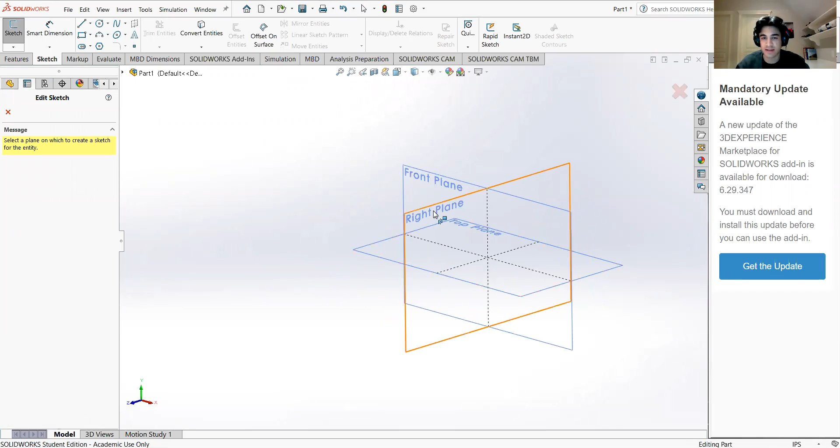So I'm going to create a new sketch and select the right plane. We took measurements from our previous workshops of our connecting rods, and we're going to make a crankshaft according to those dimensions.

Initially, I'm going to select a circle and give it a diameter. Using the Smart Dimension tool, give it a diameter of 4 inches. Then I go into features, extrude, and we're going to extrude that by 2 inches using the blind feature, meaning it'll go through anything as long as it's within that 2-inch depth.

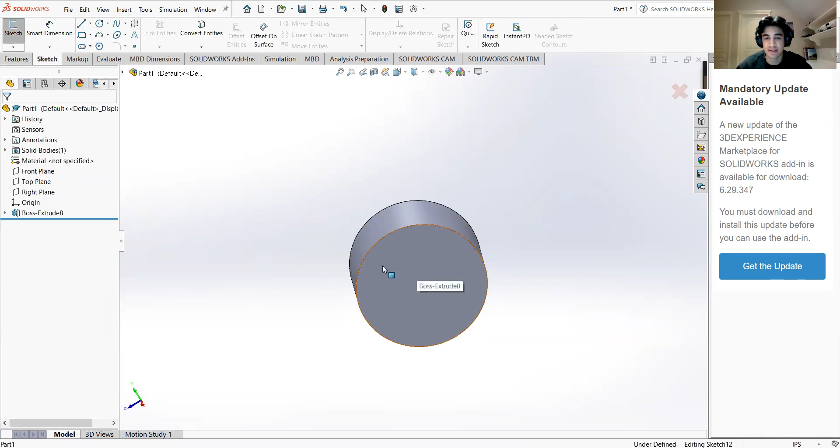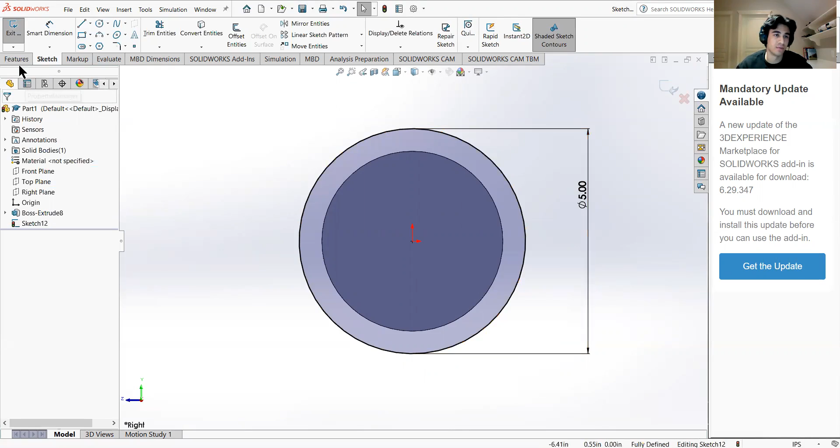We're also going to create a new sketch on the face of our cylinder, snap to the location, fit, and make this a circle with diameter 5. Now that all our lines are black, like the previous sketch, and fully defined, we're going to extrude this one as well, by 0.5 inches.

These first two parts were pretty easy, so I went through them quickly. But for this next sketch, there's a lot of detail we're actually replicating from our initial piston design, so you'll have to follow along closely for the dimensions to make sense in the context of the assembly.

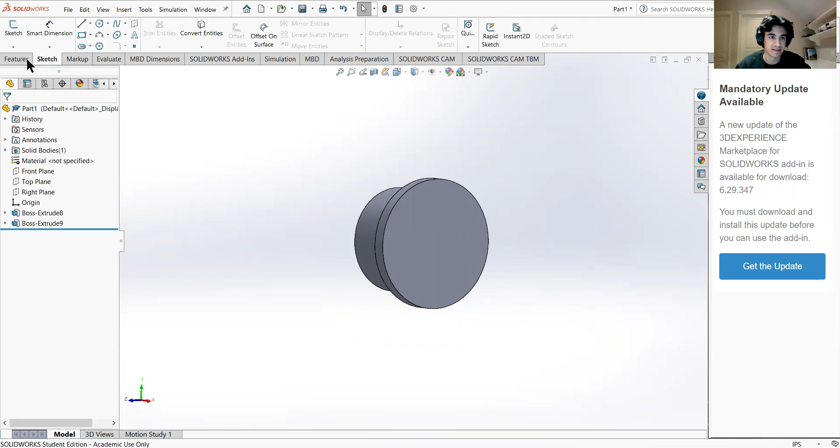I'm going to make a new sketch on the front face of our newest extrusion, snap fit that once more, and make an arbitrary 3-point arc that's horizontal, like so.

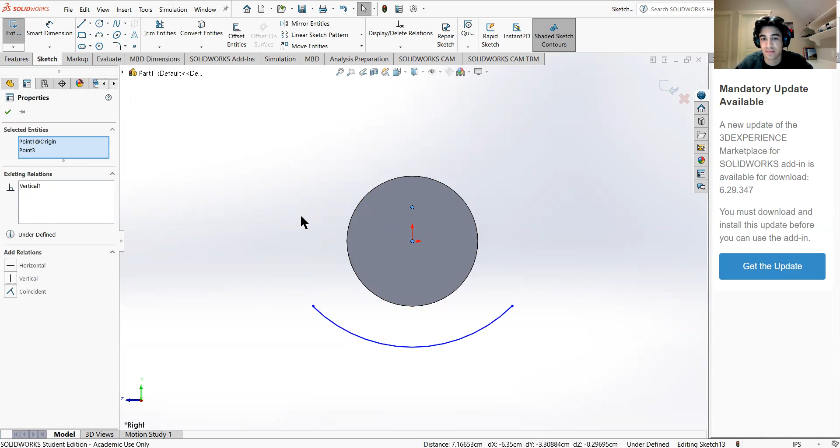I'm going to add some relations first. I click on either end, shift click on either end of this arc, and give it a horizontal relation. For this top vertex, where the radius of our arc is defined, the point at which we drop it down to create the radius, I'm going to make sure this is central to our sketch by clicking that point, shift clicking the origin, and giving it a vertical relation. As you can see, the arc is right in the center of our sketch.

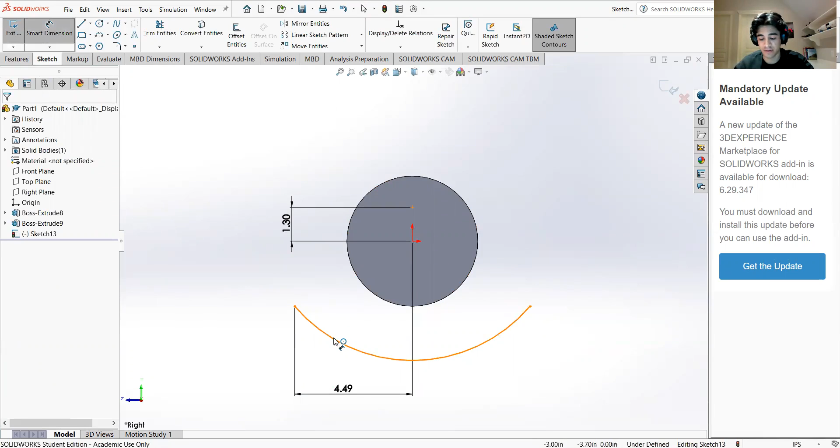We're going to give a dimension of 1.3 inches to the vertical height of these two points. Then for the horizontal length, the distance at which the furthest point of the arc reaches the origin, we're going to give that a distance of 4.49 inches. Finally, we're going to give ourselves a radius — if you click on the arc itself, it'll prompt you with a radius — and I'm going to give a radius of 7.3 inches. As you can see, everything is still fully defined, so that's perfect. We're going to move all the dimensions to this side just for clarity.

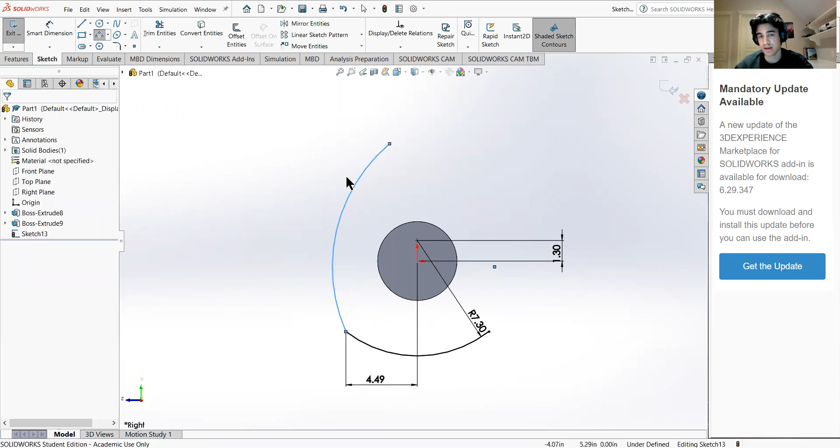Now the next step is to make another arbitrary 3-point arc. We're going to click somewhere here — it doesn't really matter. This whole sketch is creating the counterweight, or one of the counterweights, of our crankshaft: the big egg-shaped components that sway alongside the piston and keep it in place, clamping it on either end.

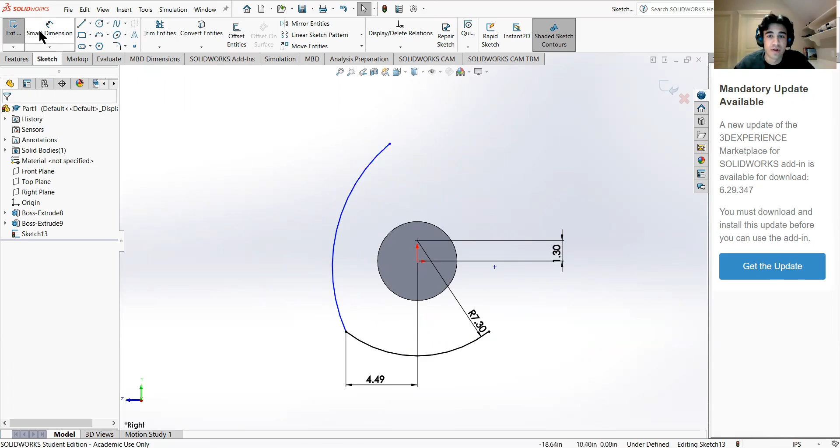So it'll provide a normal force in that regard. For this one, I'm going to select the top vertex of our arc and click the origin. I'm going to give it a horizontal distance of 3.18 inches. Again, these may seem arbitrary, but they're actually dimensions pulled from our initial assembly.

What I'm going to do is click on the arc itself and give it a dimension of 13.74 inches. So that should look like that.

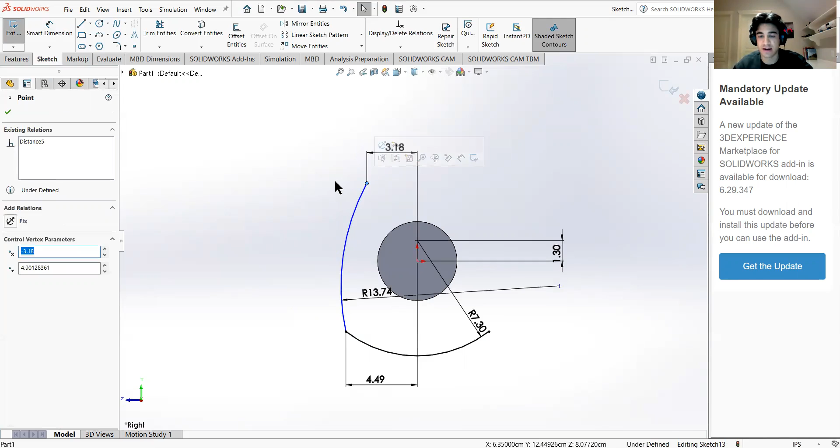We're going to move this down a little bit. It doesn't really matter how far you move it down, because the relations will sort the whole sketch out once we're done with the remnants of the sketch.

Finally, I'm going to click the Mirror Entities tool, and select this arc that we made. Essentially, I want to mirror it on the other side of our sketch without having to recreate the whole thing from scratch. So we're going to click Mirror About, and click on the Feature Manager Design Tree.

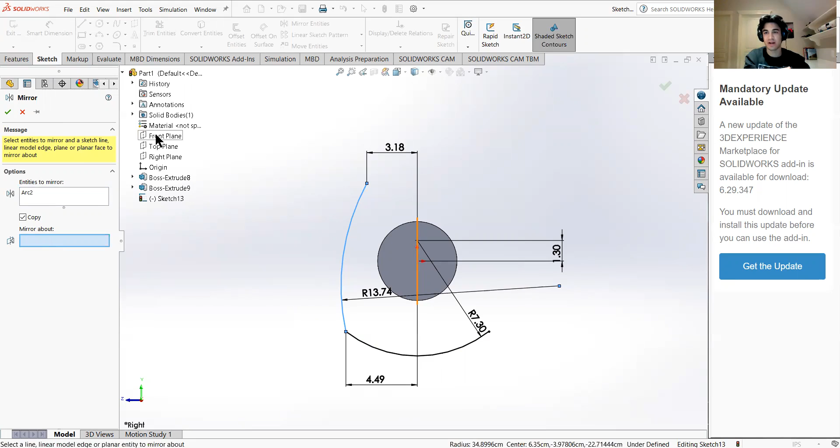What we can do is select the front plane. As you can see, it cuts right in the middle of our sketch and acts as an axis. So if you click that and press OK, you'll see that it mirrors perfectly.

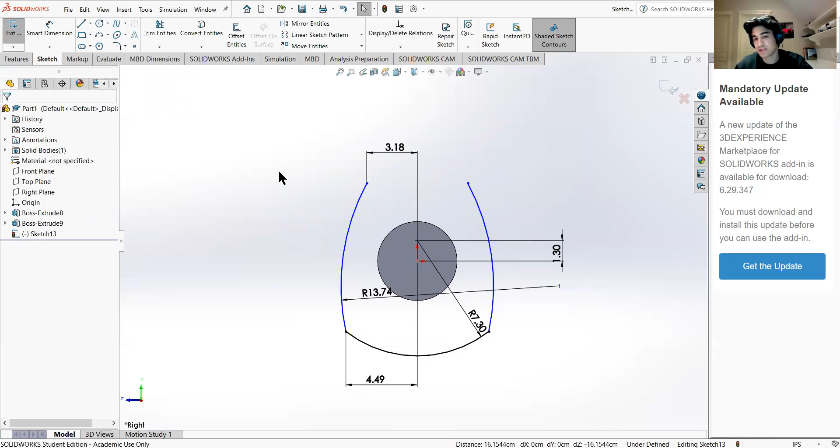We're going to apply another relation. Click on the outer edge of our arc here, shift click on this one, and we're going to say horizontal. That should help us out with the arc for now.

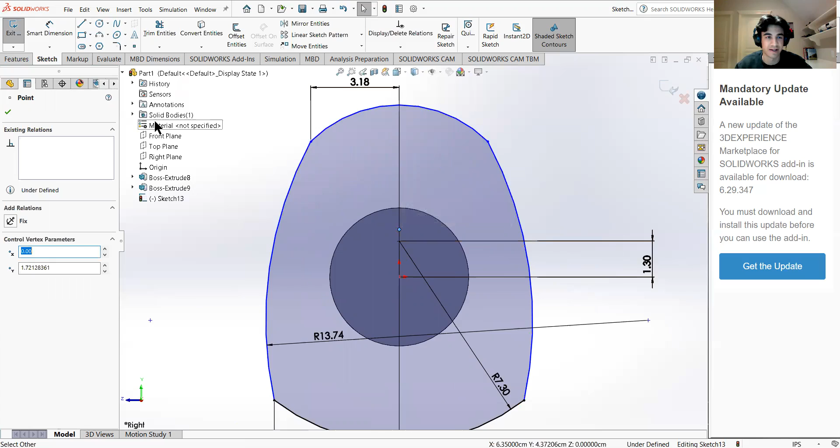I'm going to create a new 3-point arc connecting these two. Since these two are centered because they're symmetric, we can make a new arc on top like this without any concerns. You'll notice that the center line, or the axis of this arc, is directly above our origin. That shows that we've done everything perfectly up till now.

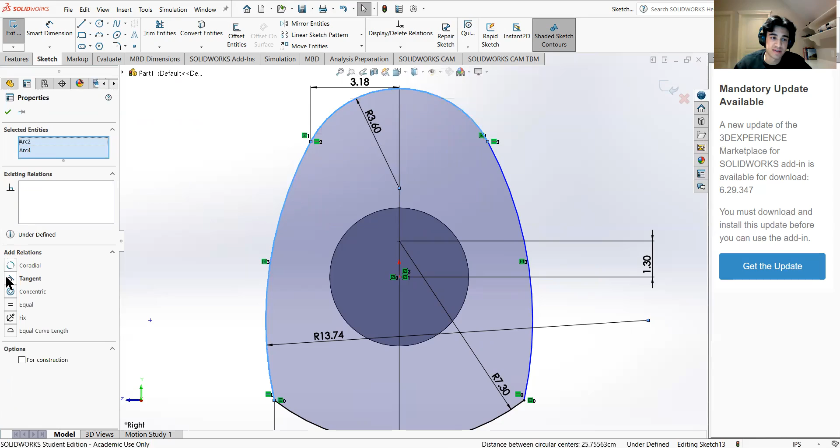We're going to give this a dimension of 3.6 inches for the radius. If we click on this arc, and shift click on our new arc, and press tangent, you'll notice that everything is fully constrained now.

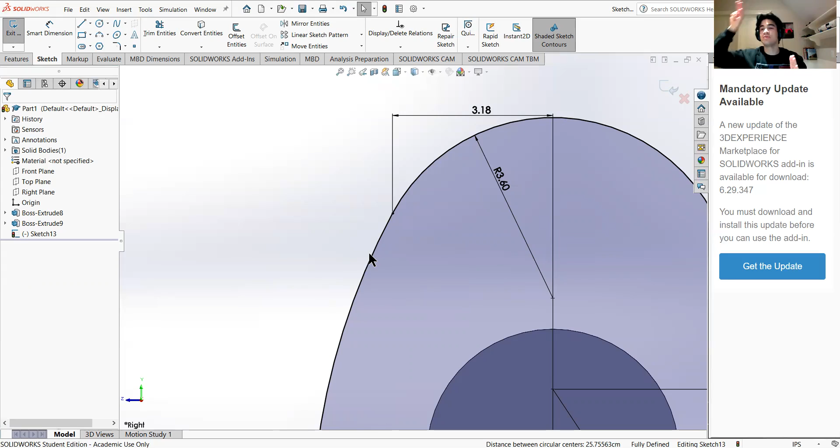Essentially what we did there with the tangent relation is we made sure that this is a rounded surface. If we were to keep the two arcs as they were, there's a chance there would have been a slight bump or roughness to our shape. So by selecting tangent, we ensure that it's one smooth line that curves all throughout. This is what we want.

Now that this is fully defined, we can extrude this. I'm going to extrude it by, let me see, my instructions tell me 1.75 inches. These instructions will also be posted on McGill Academy's website.

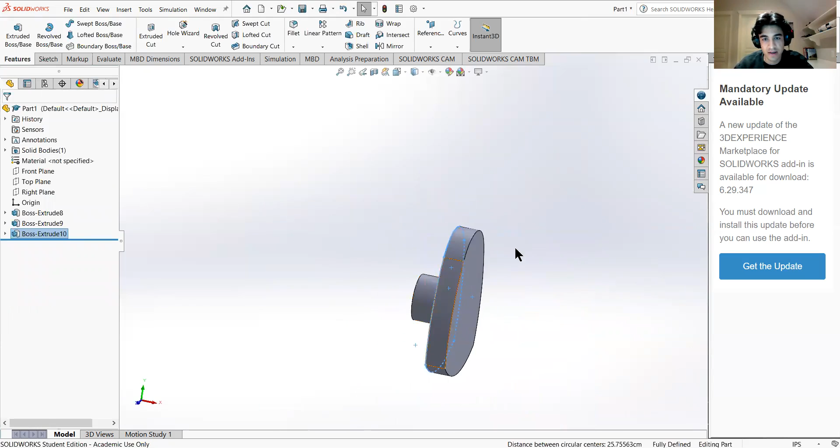So this is what we should have so far. It's starting to come together.

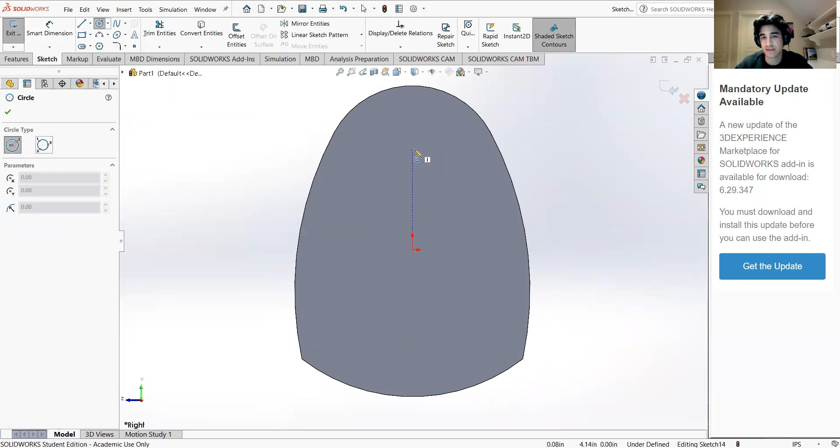Now we're going to make a new sketch on the surface of our object here. So I'm going to make a new circle, just an arbitrary circle, and give it a dimension of 3.8 inches for the diameter.

What we can do is give it a vertical relation such that it doesn't move relative to our origin horizontally by that metric.

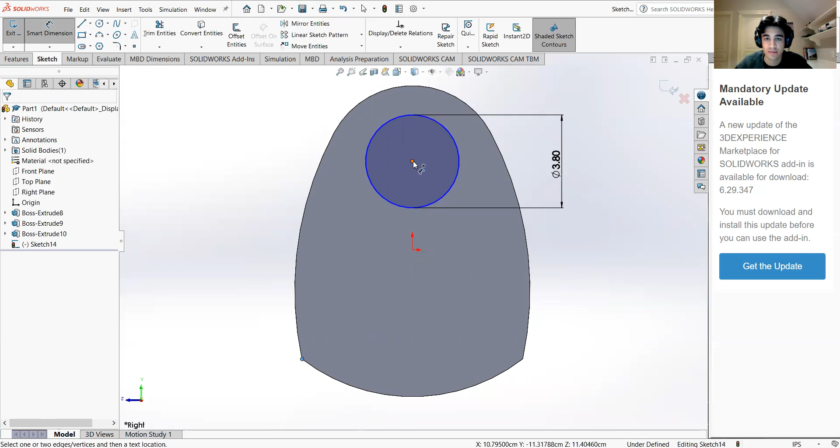I'm going to click the bottom vertex of our previous extrusion, and select the midpoint, or the center of our new circle, and give it a dimension of 7.96 inches.

Perfect. This is sort of where you want the circle to be vaguely positioned. So it's fully defined now. We can sketch this, extrude this.

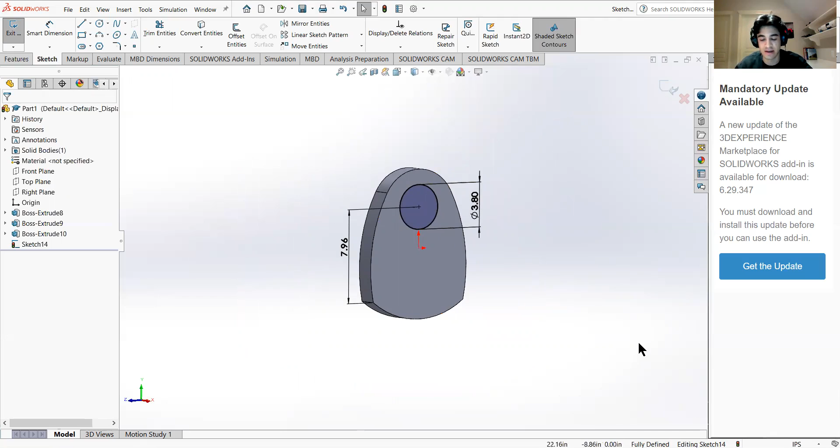What we're going to do is extrude it by half of the length that we actually want for this part, and you'll see why. So 1.1 inches is how much I'm going to extrude this by. Essentially, this will allow us to mirror everything very easily.

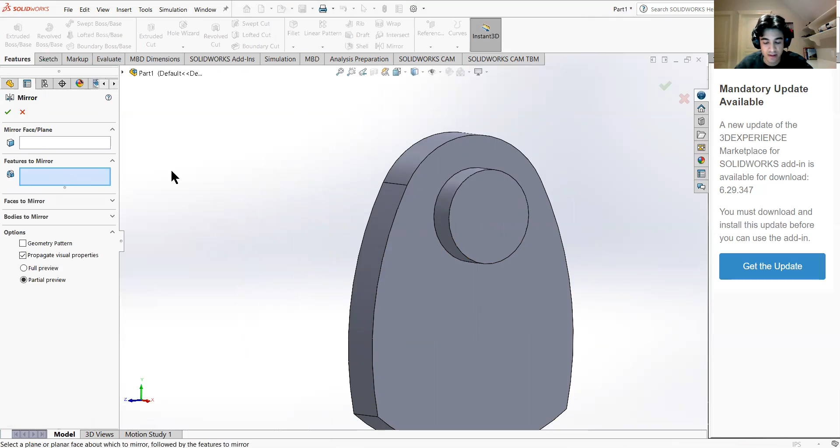So what we can do is click mirror here. Essentially what we want to do is click features to mirror. We'll click this extrusion, as well as the actual part that we just extruded.

For the mirror face slash plane, we're going to click on the front face of this new extrusion. As you can see, we're completing our assembly very easily like this without having to do everything from scratch. So if we press OK...

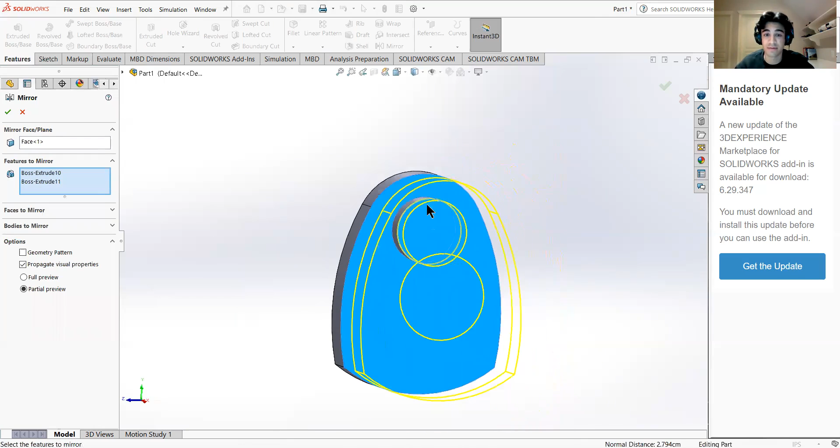Oh, that didn't show up for some reason. My apologies. Let me see. Huh, that's peculiar. Okay, let's try this again.

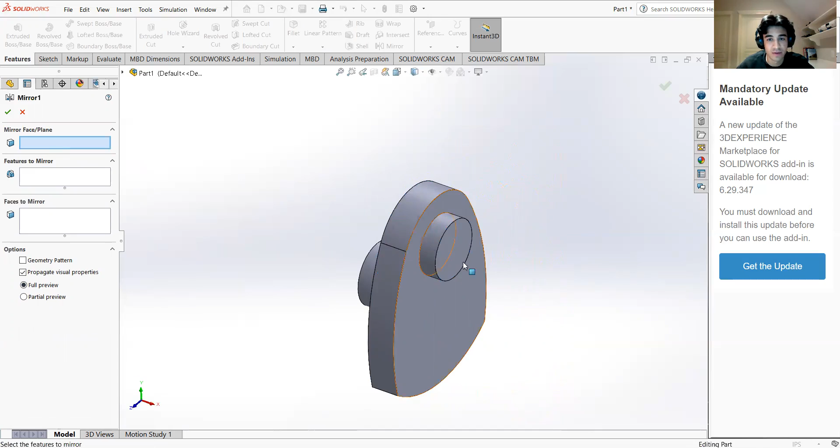So if I click on this front face here, and for features to mirror, I'm going to click this guy and this guy.

Okay, that's peculiar. No worries at all, we can actually do it from scratch if we need to. So let's do that.

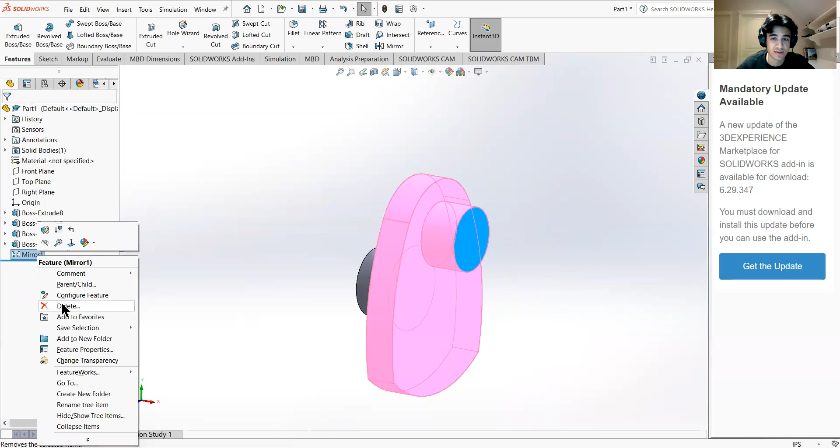What I'm going to do is extend this extrusion. For some reason my mirror tool isn't working right now, but we'll skip ahead. I'm going to extrude it the full 2.2 inches. We did halfway, 1.1, now we're going to extrude by 2.2.

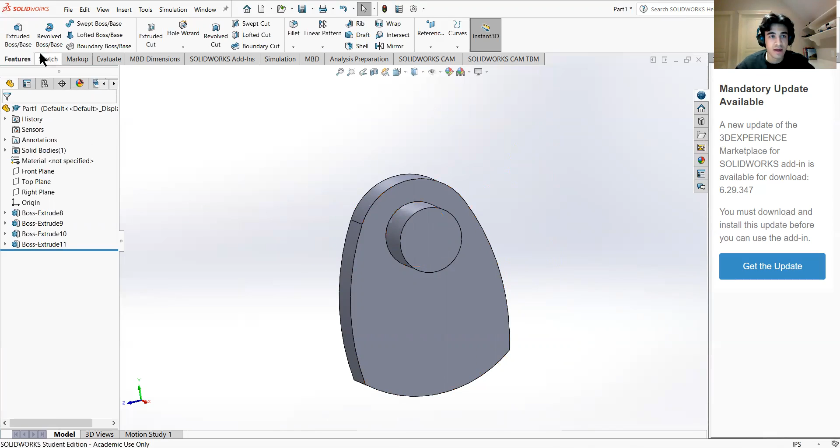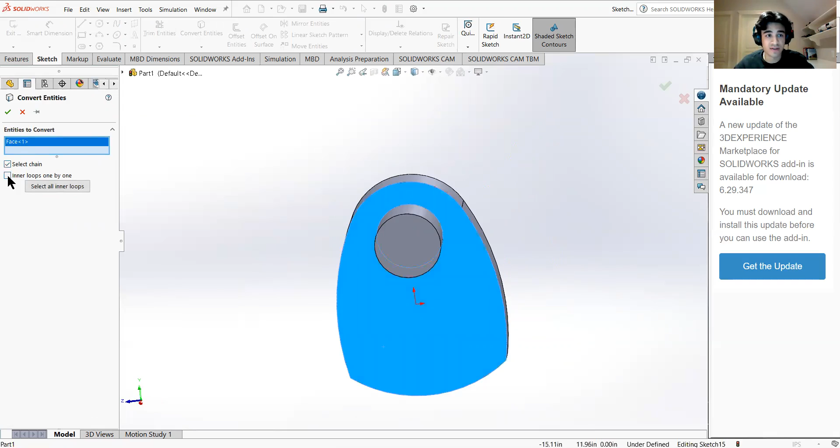For the sake of this tutorial, I'm going to use the Convert Entities tool for the next portion. I created a new sketch on this new front surface that we created, and I'm going to click Convert Entities. Essentially what Convert Entities does is it takes the face that we select, which was this previous face that we sketched up before, and projects it onto our new sketch. Think of it almost like a copying tool, but if you've done linear algebra, it's a projection.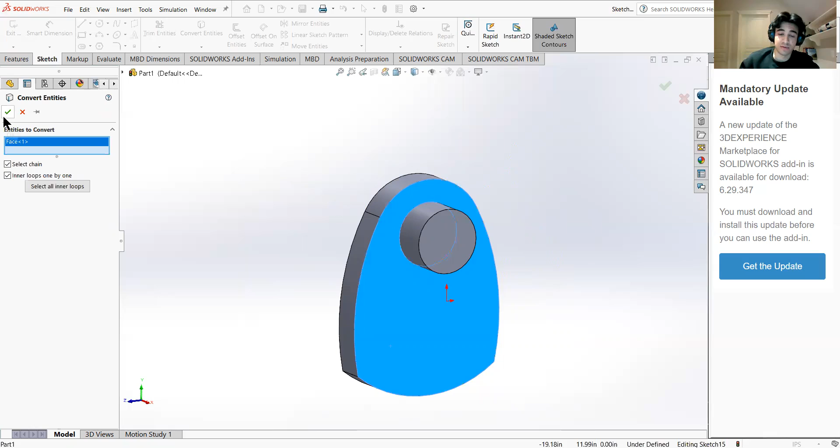So say if it was off by an angle, it would only get maybe half of that if it's at a 45-degree angle. If we press OK by selecting that face, you'll notice we've actually copied our sketch from before without having to re-sketch everything. So it's a very convenient tool.

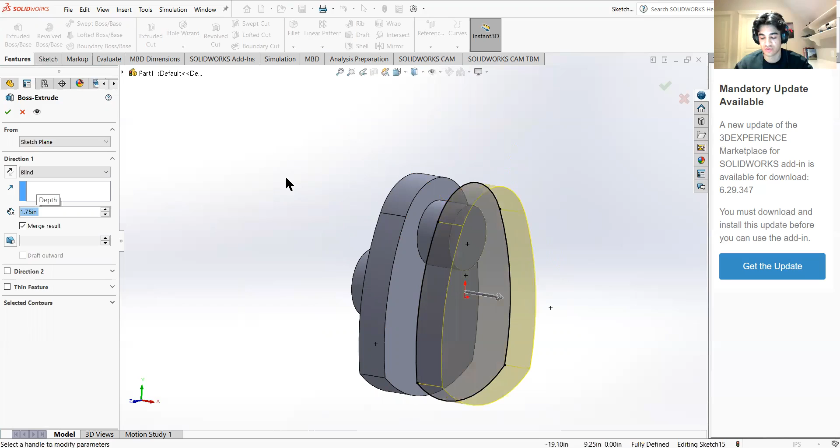I'm going to extrude it by the same amount that we extruded this first sketch that we made. This one was done with a 1.75 inch extrusion. So if we press OK, there we go. Now we have our new counterweight. So we're starting to come along a little bit here.

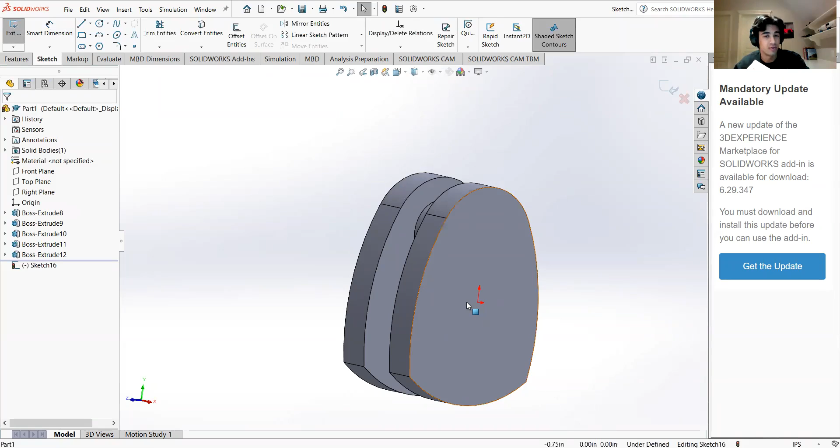So if I go back and sketch once more, I'm going to sketch on the front face of our new extrusion. What I'm going to do is convert this first face that we made, essentially extending the chain, and I'm going to extrude this by 6 inches.

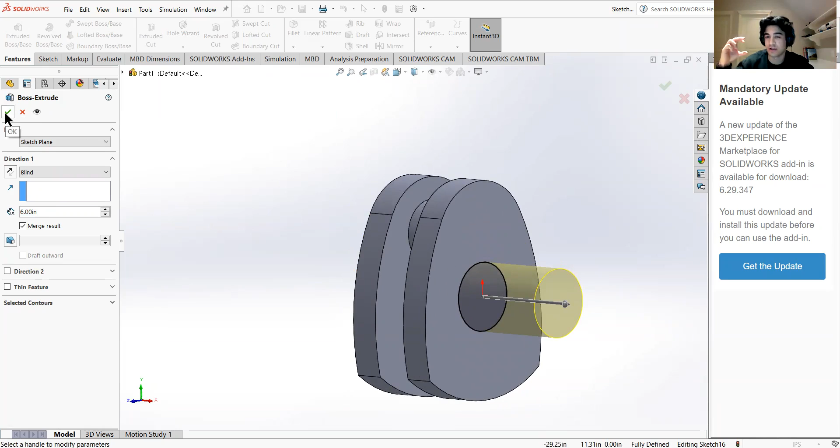So it should look something like this, and you should have a diameter of 4 inches for this shaft. Okay, all right, so let's see what else can we do here. So for this next step, this one's actually pretty creative and I do like it quite a bit.

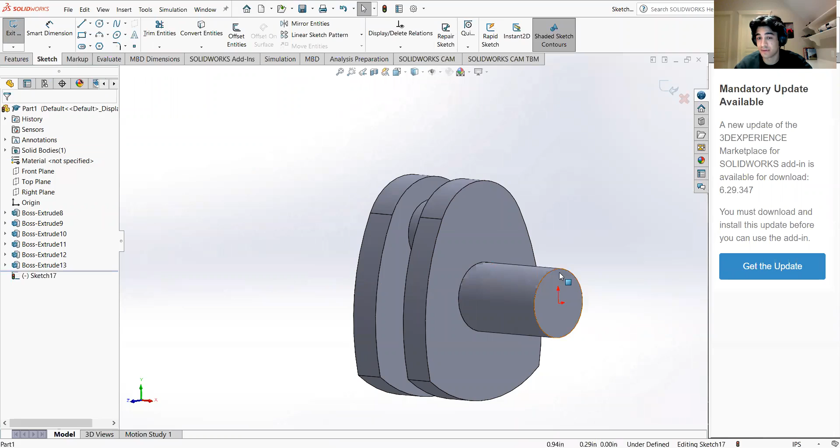Essentially what we're going to do is make a new sketch on the front face of this new extrusion, and once again we're going to use the Convert Entities tool. Now you may be thinking, why are you converting the same face again? Doesn't this counterweight need to be upside down if you're familiar with a crankshaft design? And you're actually right there.

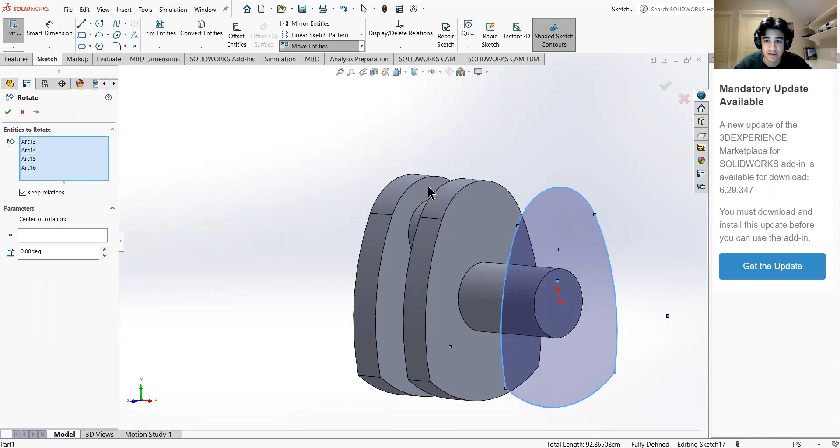So what we're going to do is click on, within the sketch portion, under this little arrow within Move Entities, we have a Rotate Entities option. We can click this entire arc, this entire piece of rotation, and we want to rotate it about the center of rotation, which is going to be this point here, the point that our whole design was made about. We're going to rotate it by 180 degrees.

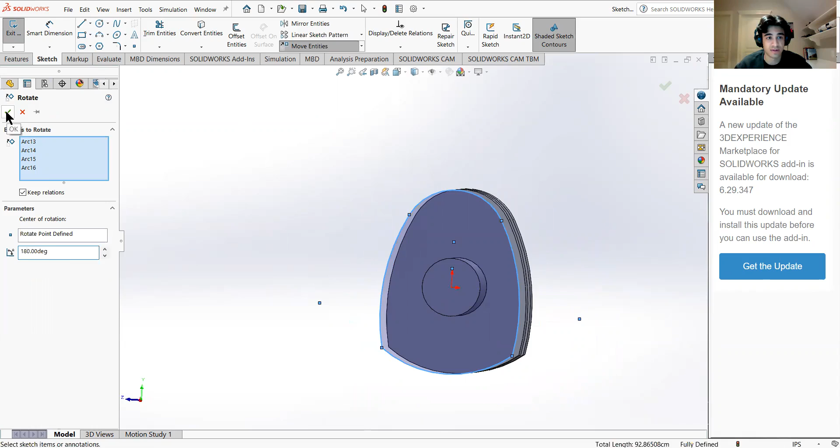So if we rotate that, oh sorry, it didn't work. My apologies, let's try that again. So we're going to click each of these entities to rotate, and for the center of rotation we're going to click our point here, and rotate by 180 degrees.

So essentially when we do that... peculiar, here, sorry, let me work this out. I'm going to check my instructions once more. For some reason this isn't... I figured it out, yep, we forgot to...

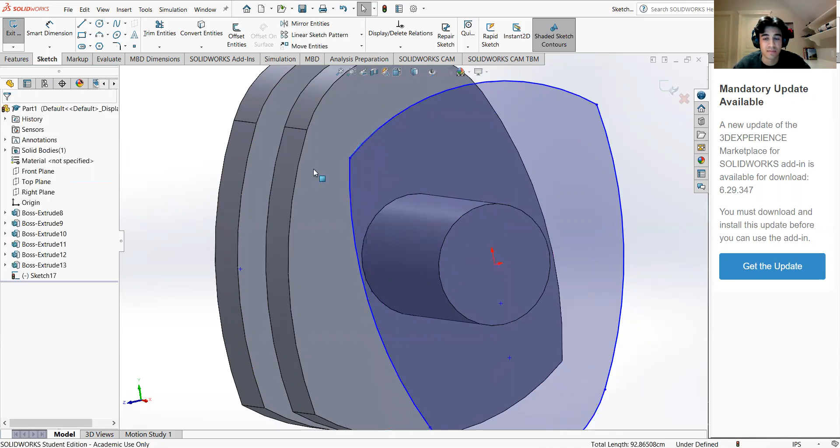Sorry about that. So if we click our center of rotation and rotate it, essentially what we want to do is uncheck the Keep Relations box. So as you can see, this is actually not defined, so we'll need to define it once more, which is perfectly fine. We'll just create a quick definition of everything, and everything's in place. So we don't need to worry about the accuracy of our actual definitions here.

So if we press OK there, and if we give this one another radius, this guy should have a horizontal relation here.

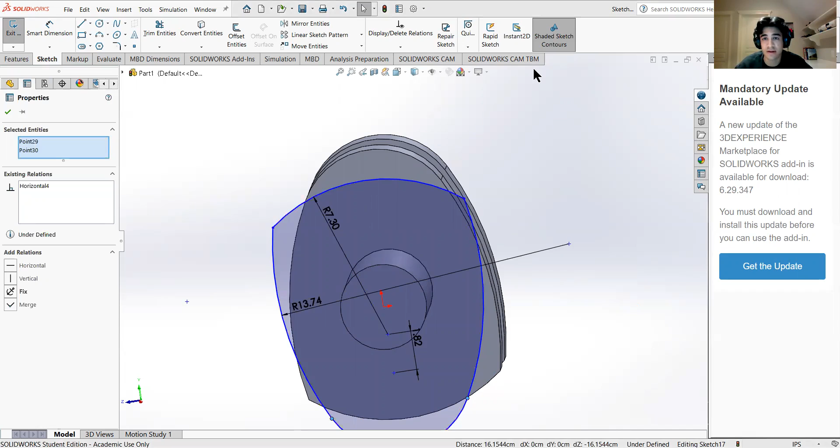And I think, sorry, one second, I think there may be a new participant joining. No, we're good, okay, perfect.

Let's see, we have this relation here.

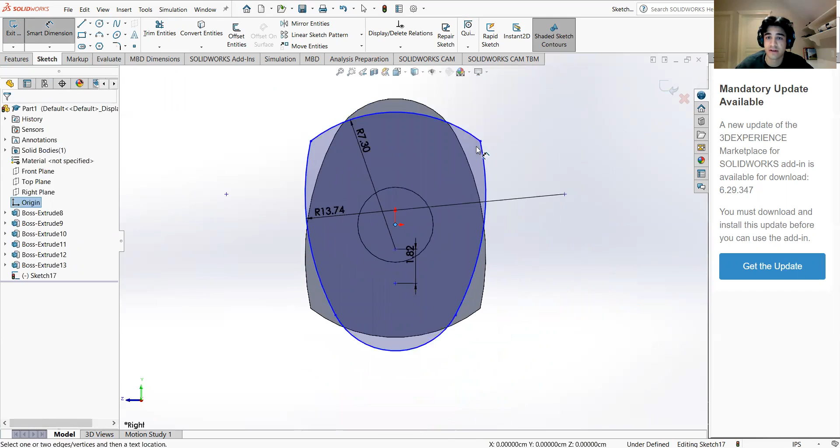The relations may seem a little bit tedious, and dimensioning may be annoying, but it's very necessary within your sketches, because if you change a certain feature within your object, you could risk losing your dimensions if you change something drastically. So you want to make sure everything's constrained to some particular reference.

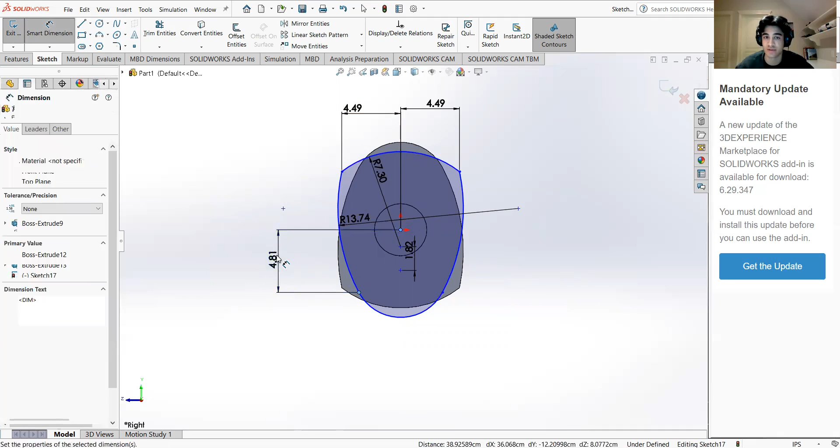Usually what you want is some sort of baseline reference. So let's add another relationship here. Okay, these guys should be tangent, as well as these guys. Let's see, are we missing any relations? We seem to be missing a decent amount here. Perfect, now everything's fully defined, and you can disregard all of these dimensions.

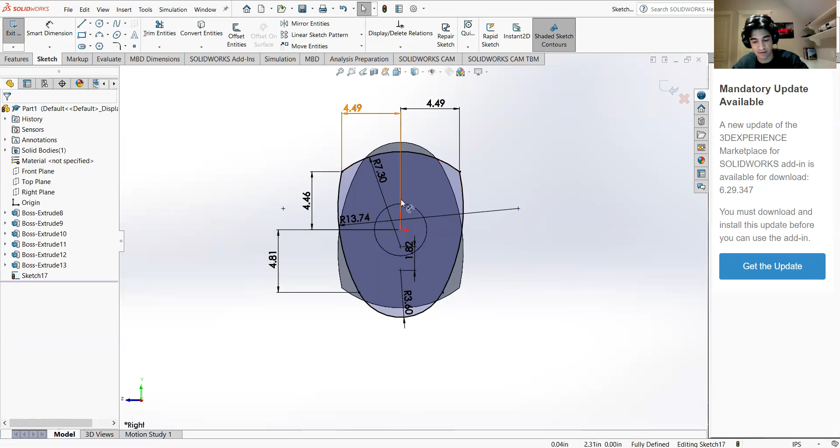So what we can do is extrude this by 1.75 inches and obtain a similar result to what we had before.

Okay, and we can do the same thing with the circle, or the cylinder that we made before. So what I'm going to do is sketch on this front face, and use the convert entities tool once more. Oh whoops, I accidentally selected a face that is perpendicular to the sketch plane.

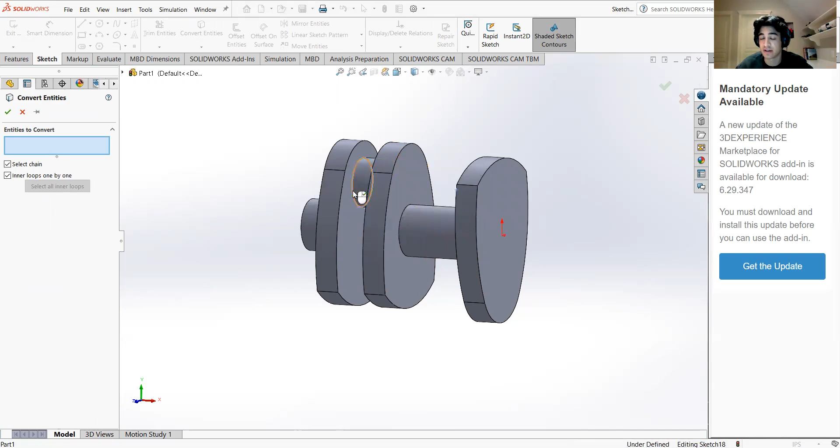What you need to do is actually click on this face, which is either parallel or oblique to the sketch plane. So we have this particular circle here, but what we're going to do is rotate this.

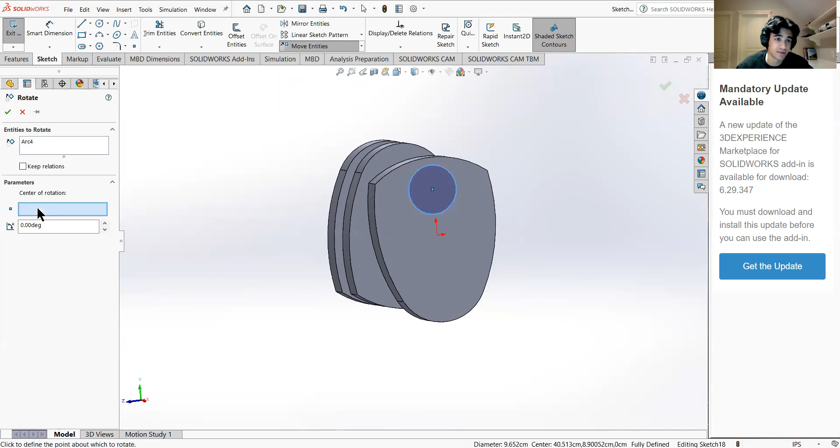Using the same tool we just used before, we're going to click on this as our entity to rotate. Our center of rotation is going to be this little point here, and we're going to rotate it by 180 degrees. If we do that, it'll get rid of our dimensions once more.

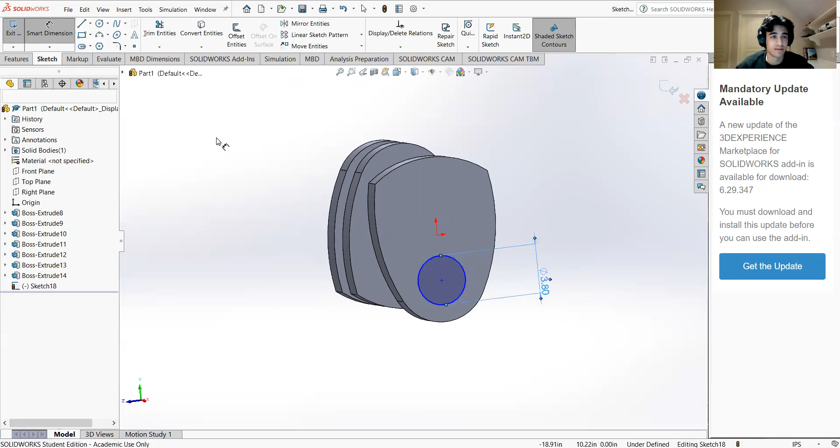Essentially what we want to do is give this a dimension of 3.8 inches, since that was our previous diameter. And if we snap fit, we want this to be 3.5 inches away, which is approximately what we had before.

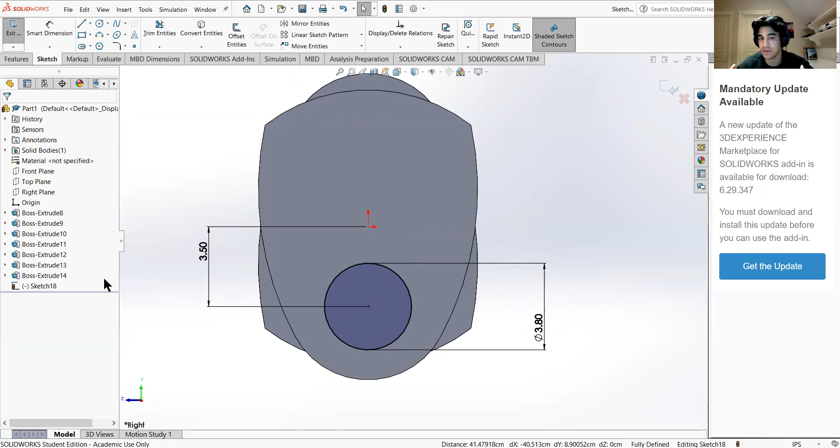And we want to apply a vertical relation to these two so that they don't move relative to each other. And if we extrude this once more, we want to extrude it by the same amount that we did before.

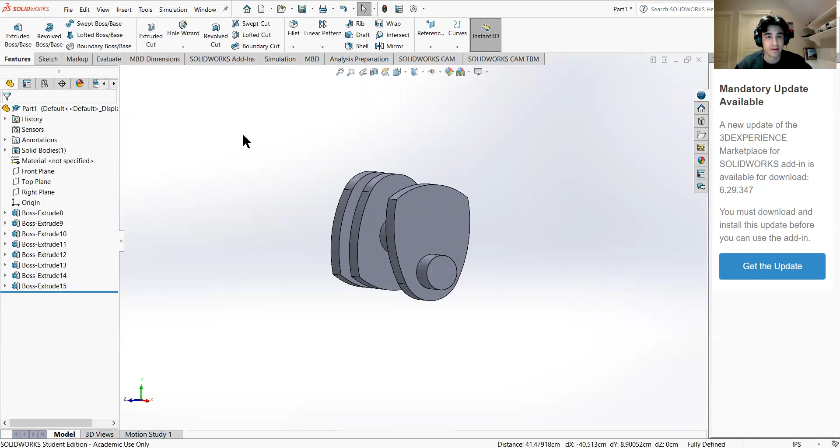Let's see, this one was 2.2 inches, if I remember correctly from before. And essentially what we can do is use the same technique that we used to copy this extrusion here.

So with a new sketch on this face, I'm going to press convert entities once more on this particular face. And then that's fully defined, so we can extrude it by 1.75 inches. Sorry about that.

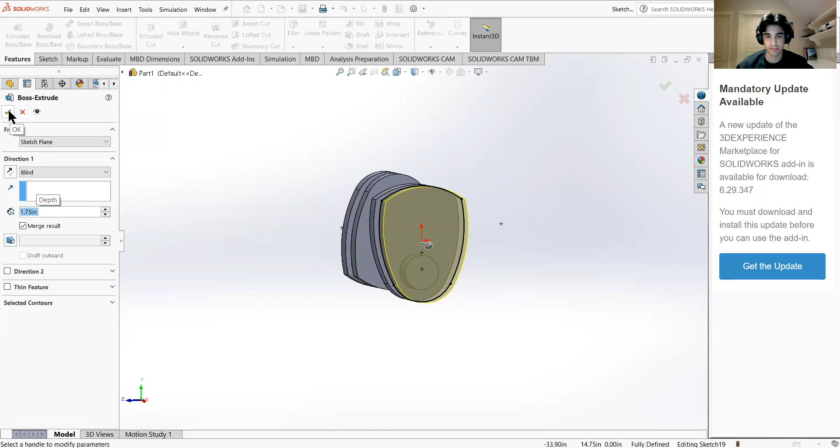Nice, as you can see it's starting to come along decently well. So that's perfect. Let's see, what else can we do?

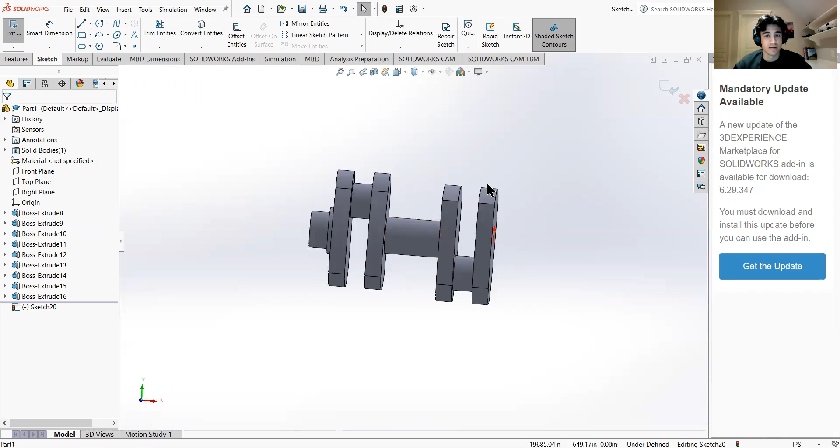We're going to make a new sketch on the front face, and extend this axle sort of connection that we had before. So what we're going to do is convert entities once more. This gives us a circle of diameter 4 at the same location that we had before.

But what we're going to do is extrude this by 3 inches, not by 4. And the reason is because we actually want to mirror the entire body.

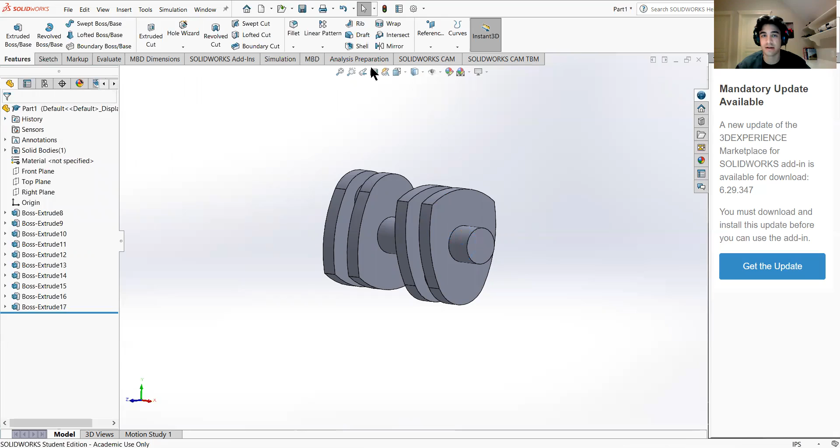So what I'm going to do is press mirror. For the mirror face/plane, I'm going to click this front face. And for the features to mirror, I'm going to select everything before it.

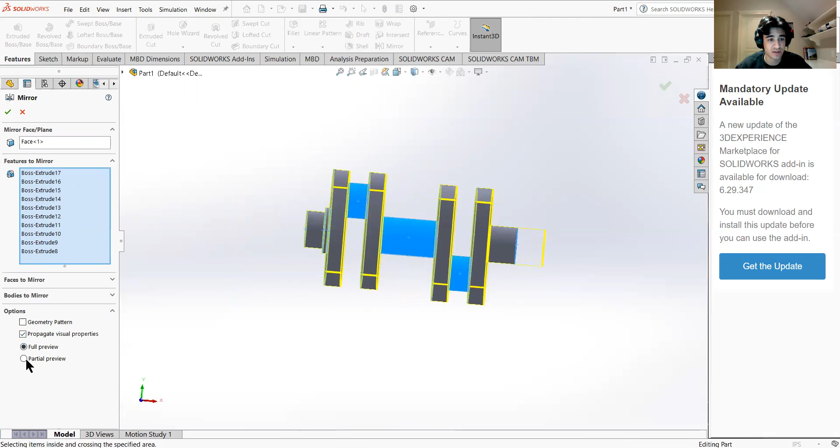And if we press OK, this should actually give us a partial preview. It did not do that properly. My apologies, let me retry that.

So if we mirror and click for our bodies to mirror, so it's a full solid body, we'll click that. There you go, we have our entire design right there.

And essentially what we can do is add some details to the ends of our shaft here. So what I'm going to do is sketch a new circle identical to the main bearing journal and extrude it by another 4 inches. Okay, so if we can do that.

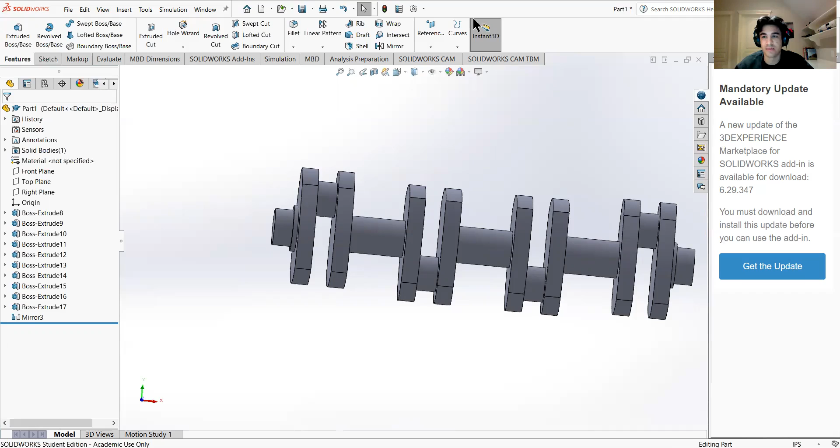Okay, so for the next portion, what we need to do is take our new end that we have here. So this is the mirrored portion. And what I'm going to do is create a new sketch, and click on this front face here.

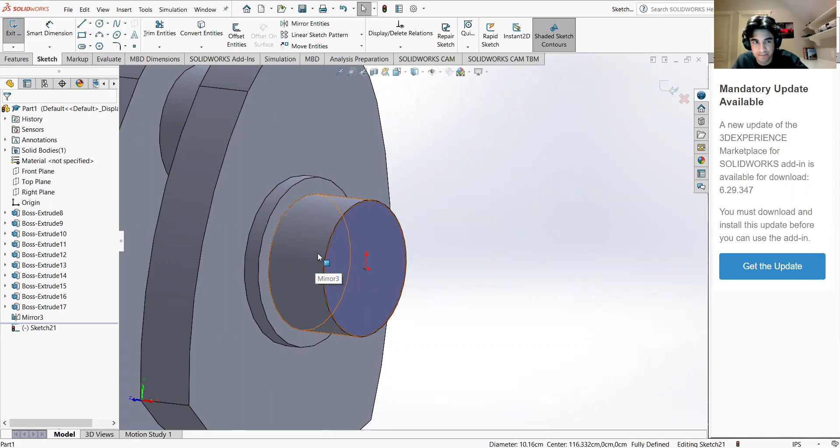And I'm going to convert the entity of this front face. So essentially I'm projecting this diameter 4 cylinder onto the end. And what I'm going to do is create a part that accommodates for the belt. So we're going to take this new circle and extrude it by 4 inches.

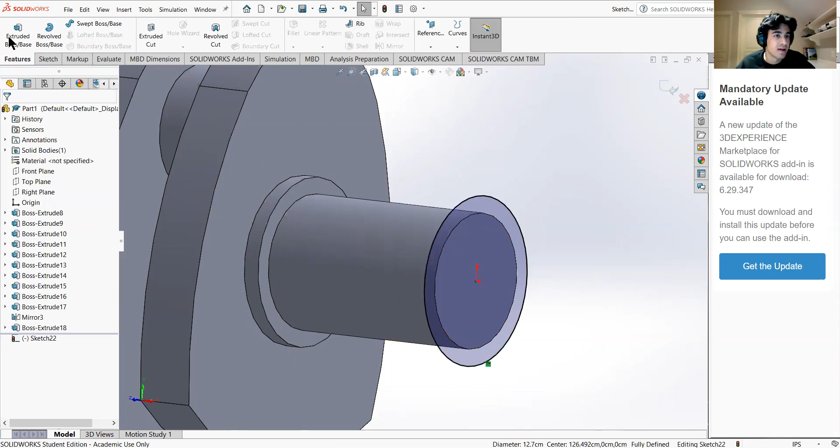That's perfect, then it merges. Now we're going to create a new sketch on top of that. I'm going to create a new circle, but this one, using the Convert Entities tool, will accommodate that larger circle we had before, that larger cylinder. So this is a diameter of 5 for this second circle. We're going to extrude this out by 2 inches according to what we've written, so 2 inches should be adequate.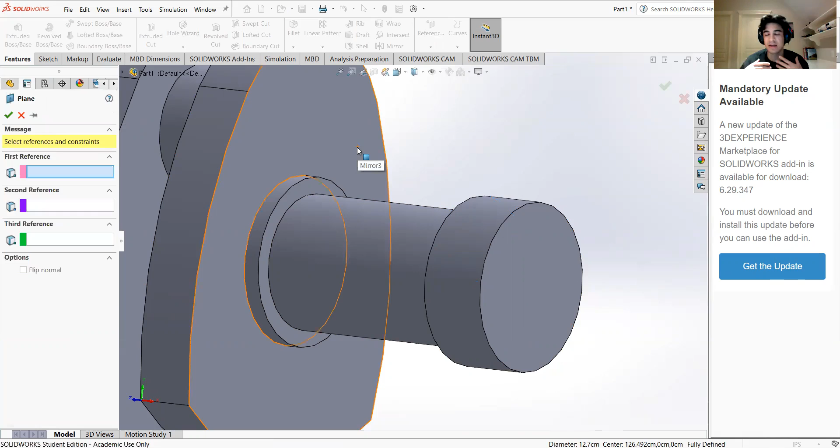Now we want to make use of our sweep cut tool. I'm going to create a new plane, which will mark the halfway point for our sweep cut. You'll see in the context of our sketch how useful this plane will be. I'll click this top half as our first reference, and the bottom edge as our second reference. As you can see, it automatically creates a plane in the middle of both of these. That's a very useful trick.

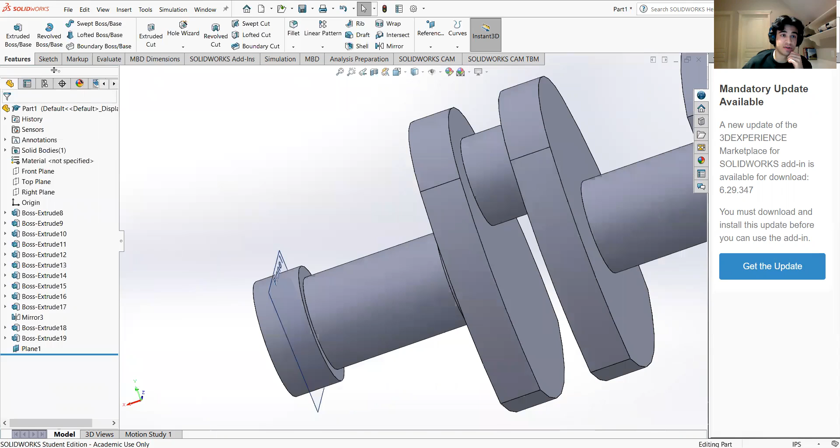I'm going to create a new sketch, but first let's go into our feature tree to decide what it should be on. The front plane seems to be the best option because it cuts right in the middle of our plane - it's perpendicular, but we'll still have a nice region for our sketch. So I'll click on the front plane here, and with it selected, I'm going to snap our view to our part.

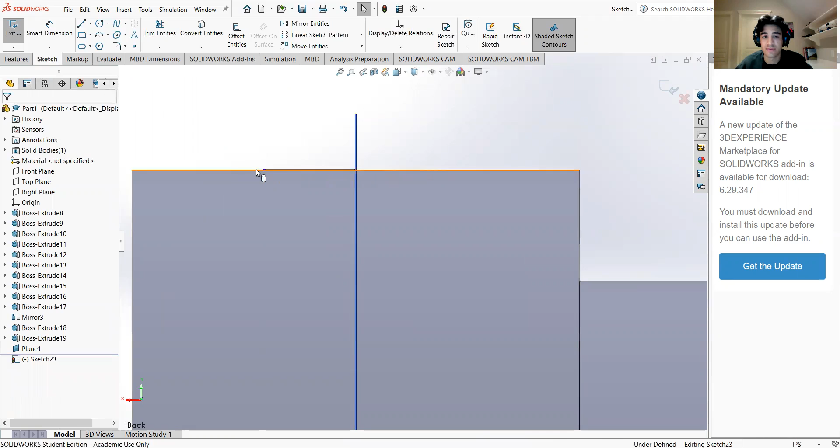I'm going to make the following feature: a line from the top edge of this cylinder to our plane, which will be 0.5 inches apart from the outer edge of our cylinder.

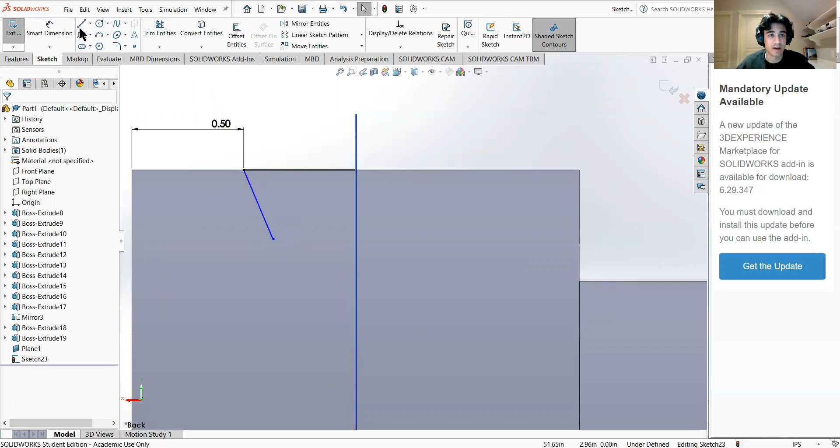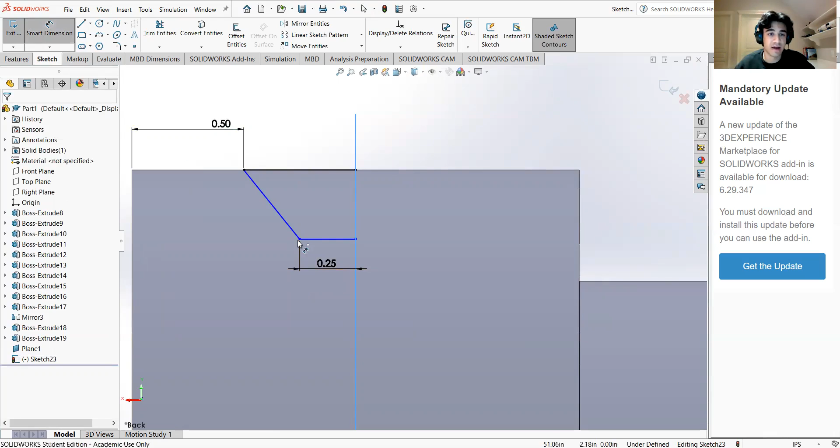Then we're going to make a diagonal cut in - doesn't need to be perfect. And we're going to have another point connect to the actual plane. This point here should be 0.25 inches apart. Altogether, the actual depth of this cut should be 0.5 inches.

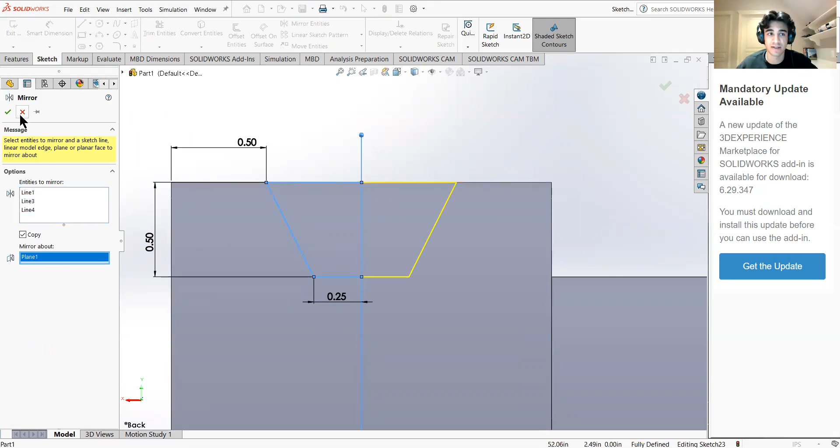As you can see, this is fully defined. What I'm going to do is mirror this about our axis. I'll click these 3 lines we made, and mirror it about the plane we just made. As you can see, we have this perfect groove that we're going to cut into our cylinder.

We can apply the sweep cut feature or the revolved cut feature - both work. For the revolved cut feature, essentially what you'd need to do is create an axis of rotation, but for this, we don't have to do that.

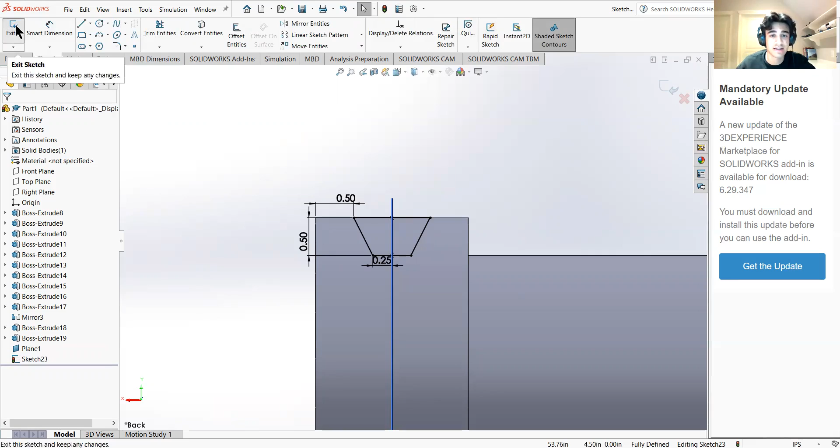So let's do that. If I exit our sketch and click on swept cut, having our profile selected, for the guide curve we can follow the path that we made. It's going to be on a sketch profile... okay, I don't believe we actually made the path for it.

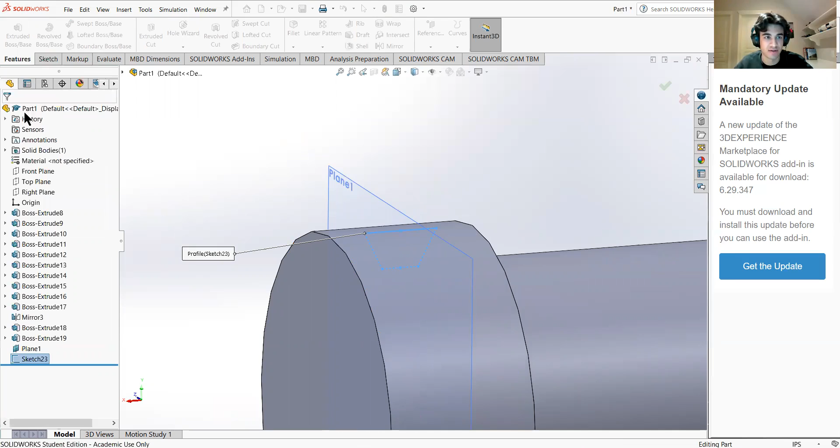So what I'm going to do is make a new axis, and we'll use the revolved cut instead. Let's get rid of this, click on that cylinder, and there you go - we have a new axis, and we can make a revolved cut, clicking this sketch that we just made.

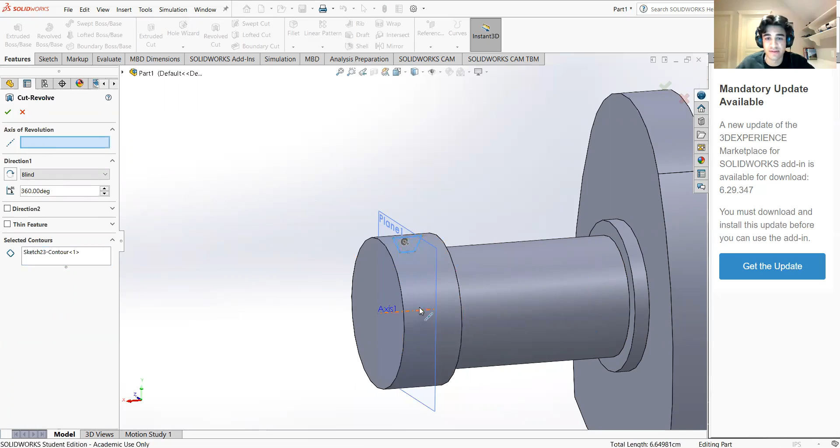For our selected contours, we're going to click that sketch we just made, and for our axis of revolution, we're going to click this axis. It's going to be a 360-degree cut that fits like so.

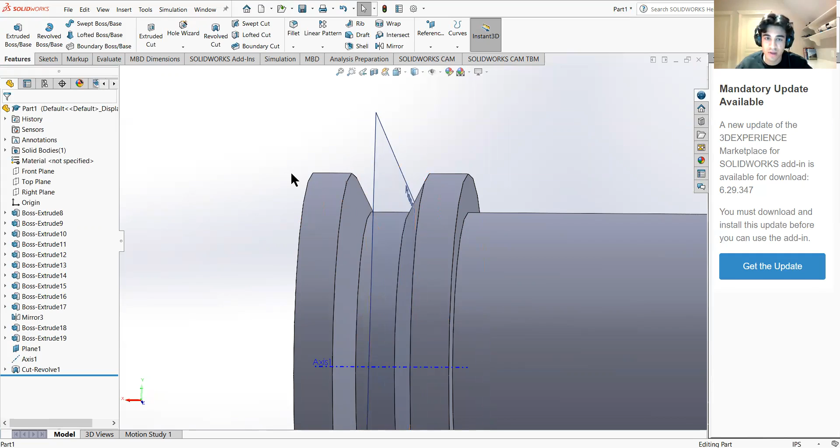There are alternative ways of making this particular feature. What we could have done is make 3 different cylinders and then put a chamfer in between, or have a tapered cut, but this works as well. I'd say this is the preferable option, and essentially that rounds off our crankshaft.

In the next tutorial, what we'll be making is the actual casing for the pistons, so we'll be making the cylinders in which they fit into, and we'll also work on a motion study for all of this. So that pretty much wraps up workshop 3.